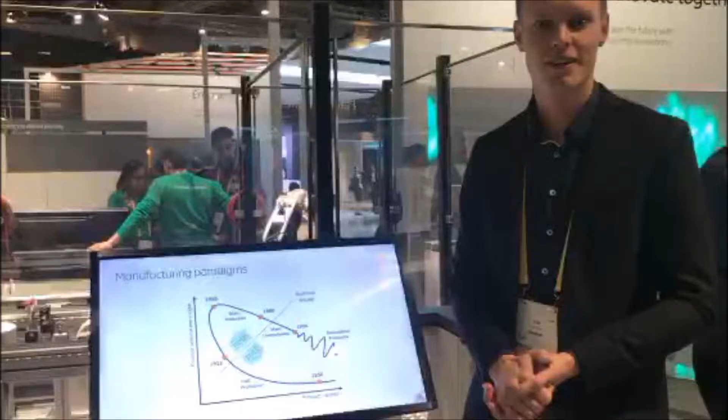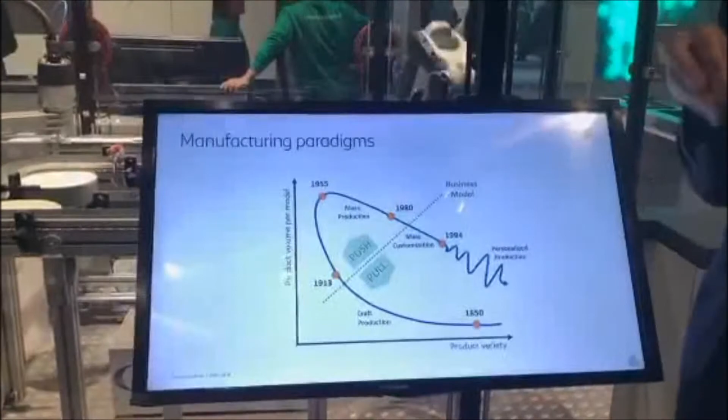The fourth industrial revolution is happening at the same time as the fifth technology revolution is about to ramp up with 5G. We see that it's a fundamental shift. We started in 1850 with very customized production, then went into mass production, and now back to full flexibility in production for mass customization again.

For example, Adidas introduced new shoes that can be customized for you in the store, which now puts new requirements on the production environment. You can't have a big line with a lot of robots anymore. You have to have the robots collaborating and moving around, changing the production instantly based on demand.

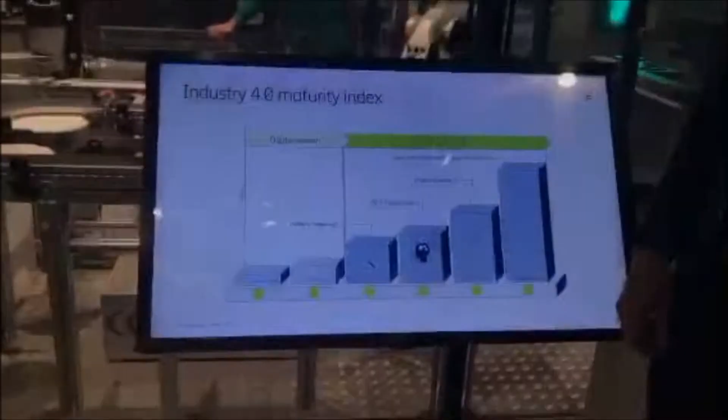So this is where we're standing now: full customization, massive customization and flexibility. There's a journey here with Industry 4.0 where you get into full adaptability, the end stage, where operation technology, like a robot that you see over here, and the communication players like Ericsson and IT players are all merging. That is what we refer to as cyber-physical systems.

This puts new requirements on connectivity. Now we have to have ultra-reliable communication, extreme low latency down to 1 millisecond, and reach speeds up to 20 gigabits per second. This is insane, nothing we've seen for phones before, but now it's needed for robots. So connectivity is fundamental to enable this fourth industrial revolution.

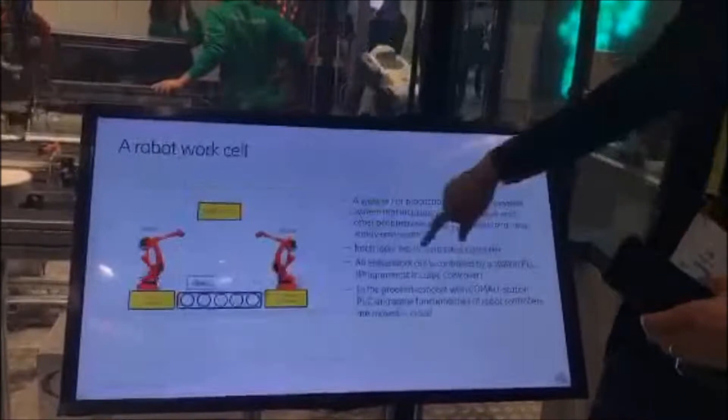So what do we see here? Here you see two robots from Comau, one of the world's largest robotics producers, in Italy. The brain for these robots sits in the stationary PLC, Programmable Logic Controller, and that is how these robots communicate.

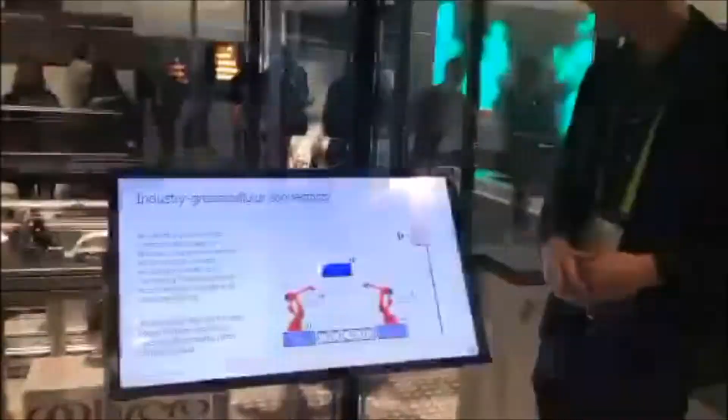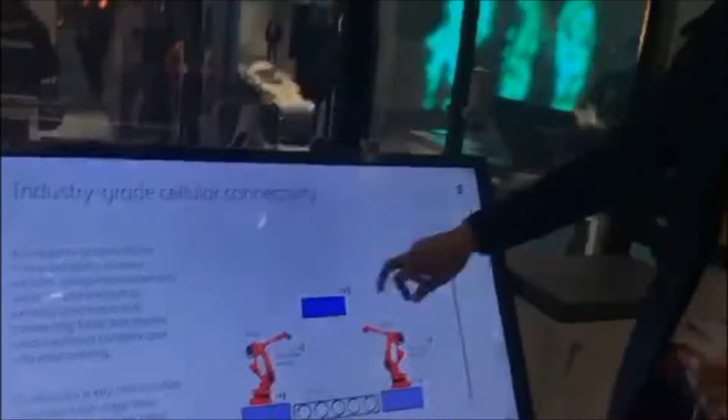What we do is put in a radio cell, a micro RRU, or smaller radios, that connect to the stationary PLC and the robots so that we can cut the wires. By doing so, we can move step by step down and enable more robotics and more cloud computing up in the sky, where you can add new functions with AI or big data.

The first step we see right now, with the help of LTE that you have on your phone, is where we can get to a latency around 30 milliseconds, and lately we got up to 2 gigabits per second. That is where we take the task controller, parts of the brain, up in the cloud.

With 5G though, we can move a lot more computing power that had to be in the device before up in the cloud, and that's where we talk about 5 milliseconds and even down to 1 millisecond.

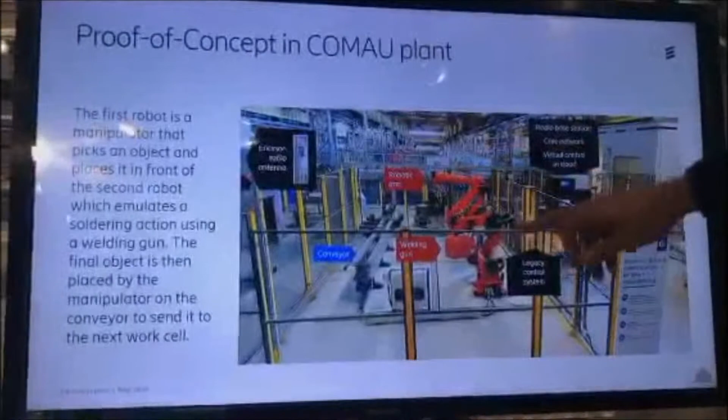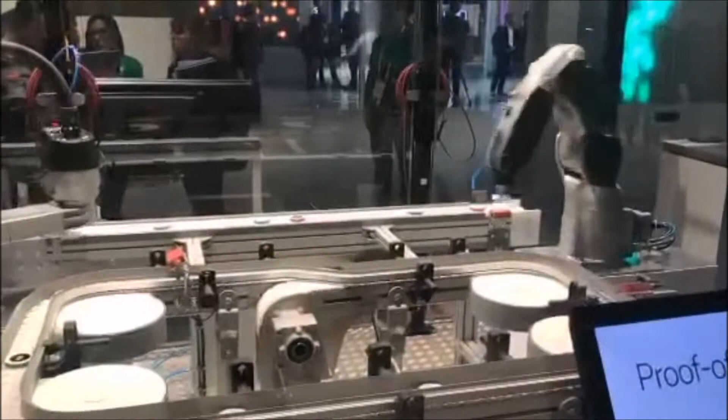This is just the beginning of the journey, and we're happy to see what we're doing in this collaboration with Comau. This is how it actually looks in real time right now in one of the factories in Italy, with bigger robots. What's behind us is more a mock-up, smaller pieces of these robots collaborating, just connecting to each other. But in real time here, we can see the future where you cut the cables and the robots move around freely.

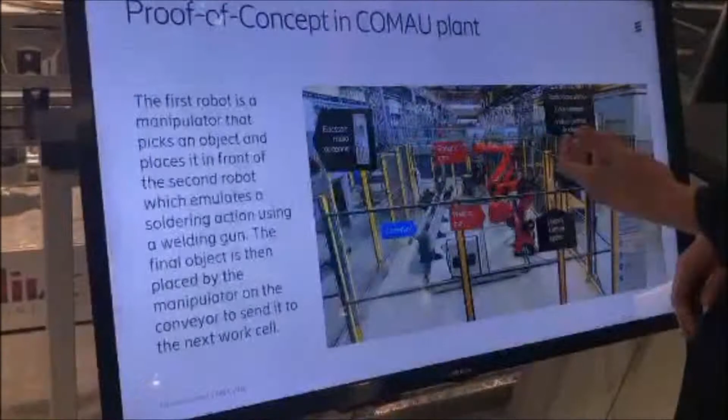We get into concepts of cobots, collaborative robots, talking to humans and working with humans. This is the setup we started to do now. With the help of LTE, we set the foundation for 5G and move a lot of this computing power up in the cloud. So the robot is going to get dumber as a physical device, but a lot more intelligence is going to come in the cloud.

If you imagine when you started with your phones, we introduced LTE, and all of a sudden you have billions of apps. We'll see the same thing happen with robots, where we're introducing 5G, and we're going to have billions of apps for industry uses. That's where I think it's super exciting with what you guys are developing, and to see what we can do to shape the fourth industrial revolution.

So this was a little bit of a view of what we're doing at Ericsson with Industry 4.0. Does anyone have any questions from the audience?

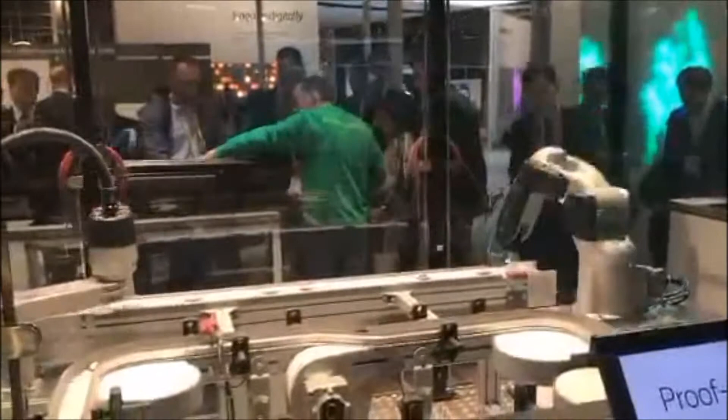That's a good question, Glenn. If you look at these two robots right now, the whole purpose of moving a lot more intelligence up in the cloud is that instead of having multiple brains in each specific robot, you have one common brain, which means their collaboration speed goes faster. That's actually the whole purpose of getting multiple, even down to thousands of different robots, able to collaborate. Not just with humans, which is actually harder in a way, because we can't virtualize our brain, but we can virtualize their brain. So that is very much the first step.

So is it many to many or one to one? Many to many, so it's IoT. But as you see in the first case here, it's one to one. Yeah, but the whole purpose is to see many to many.

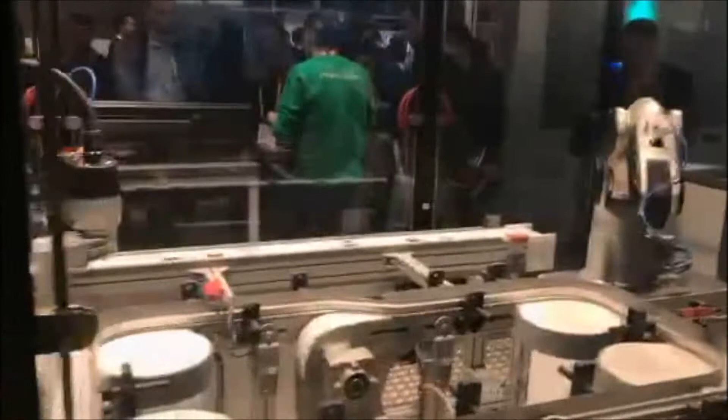Is this a proof of concept, or is it actually deployed at this factory? It is actually deployed at the factory, but in a small scale, because you test it out and then you move it to the fuller, bigger scale. It's a step-by-step approach. All right, excellent. Did that answer your question, Glenn?

Anyone else have any questions about the future of factories and robotics? It's an IoT demonstration with machine intelligence and artificial intelligence.